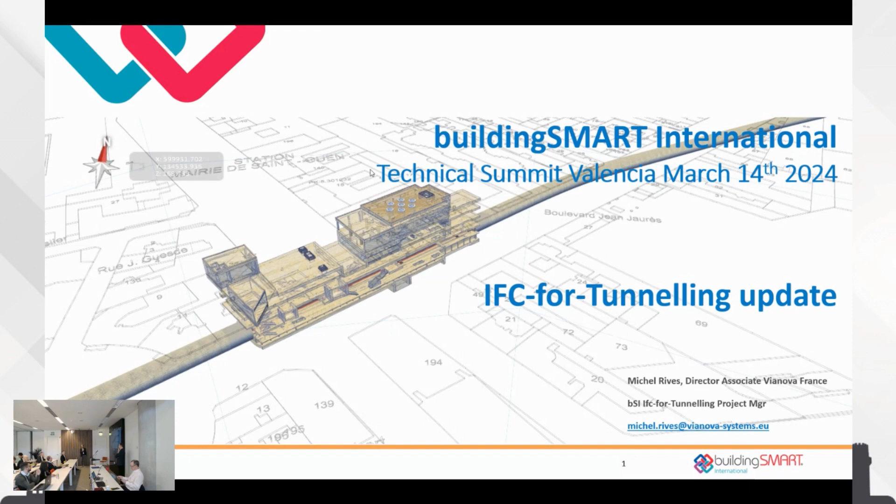Okay, thanks. Right, so the agenda for today: basically an update on where we stand in terms of the deployment, meaning the integration by software vendors of those concepts that we've been developing. A word on the collaboration that we have been having with OGC. That has been as well something key in the project itself to make sure that we were co-developing concepts with OGC, specifically when it comes to geotechnics.

That's a subject that has been touched yesterday morning and this morning as well, what it is that BIM and GIS have in common. This one subject matter, subsoil modelization, subsoil knowledge or lack thereof, that has been something that we, from the ground up, decided to develop in common with OGC.

So we have a common conceptual model for geotechnics. And then the deliverables that we are to produce so that the outcome of our project gets into the publication process for ISO.

Thanks, Andre. So nice of you.

So I was talking about a terrific team. So, you know, some project teams typically would meet in a bar. They would discuss potential concepts, future ideas in a bar. We discussed in tunnels. So this took place in Oslo at the previous BSI conference.

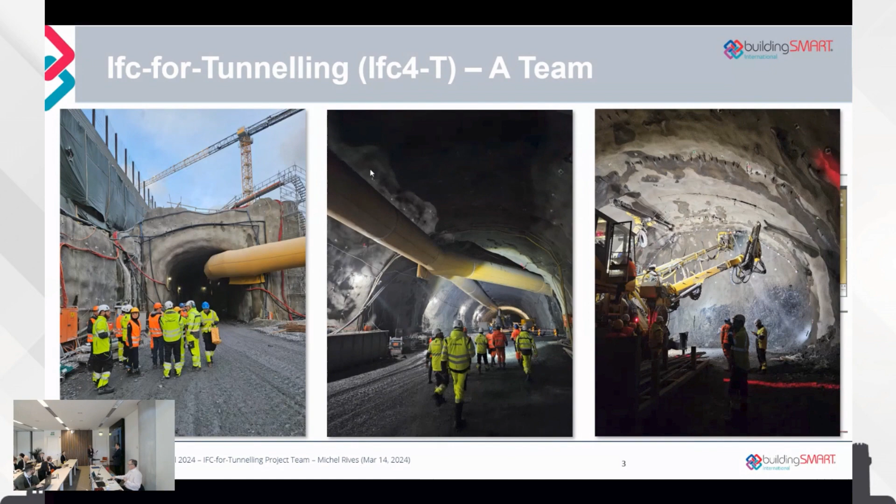So that people can understand exactly what is the implication of what it is that we are developing. So it's really to help design, but it's to help construction. It's to help with as-built recollection, and to some extent, it is meant to help as well with transferring over information to GIS, transferring over information to assets management. So we have all those concerns in mind when we started the project.

Okay, you're getting lazy now.

You've seen that before, but we extend the 4.3 schema with specifics for describing what the tunneling structures are about. That's one addition. But the other addition is this one thing that is much more transversal and describes what the subsoil conditions are. This serves underground structures, but also bridges and buildings when it comes to deep foundation. So all that part we are adding to the IFC schema will serve those different domains.

I think that is rather key and to the benefit of several project teams and domain rooms. And of course, at the end, we enrich the ISO schema. Thank you very much.

The way we decided to structure the project was to make sure we had representatives from different profiles of stakeholders, meaning designers - so basically geotech engineering bureaus, civil engineering bureaus - owners, infrastructure operators, national bodies, who would typically be prescriptive as to how to use BIM and open BIM in the context of those projects.

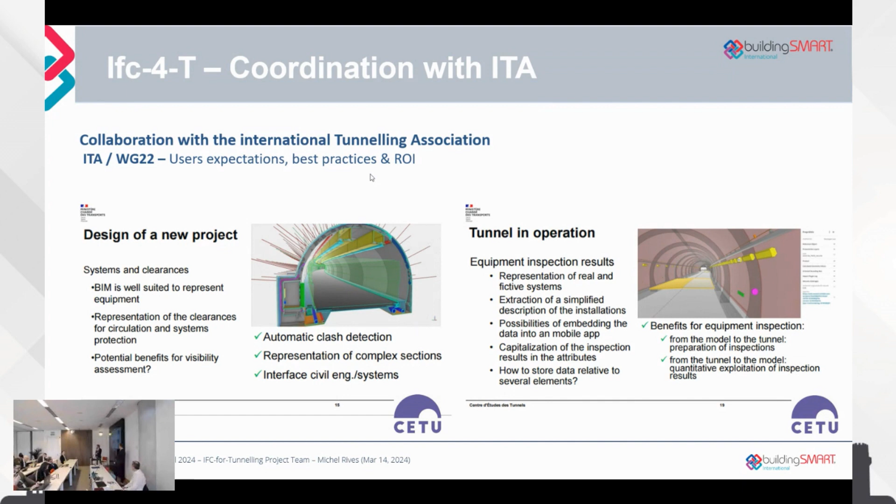In addition, they produced recommendations. The reason I'm stressing this is because in these international guidelines, or in the German one or the French one, to give a few examples, they really refer to IFC for tunneling and what the value is. Those documents we do not produce, they produce - and of course, that engages us clearly with the responsibility to deliver upon that expectation.

So let's jump a little into the scope itself. We have three main areas that we are covering: geotechnics, structures - underground structures - and systems, the systems that allow operating an underground facility, an underground tunnel, or an underground space.

To start with, as far as geotechnics, what we did first was an analysis of what was existing today in terms of what OGC was covering in terms of geology, and what BSI was covering in terms of geology as well.

Because we identified quite quickly that everything that relates to geotechnics when it comes to the construction of an underground structure was not really properly covered, we ended up stating that we needed to develop those concepts, those object classes, to describe how a subsoil configuration can be specified, and whether one knows or doesn't know well what the underground situation is about. Typically you would make an assessment before you start to excavate, and then you face the real situation whilst you are excavating, and then you need to document what you have faced and what you have been reinforcing, for example.

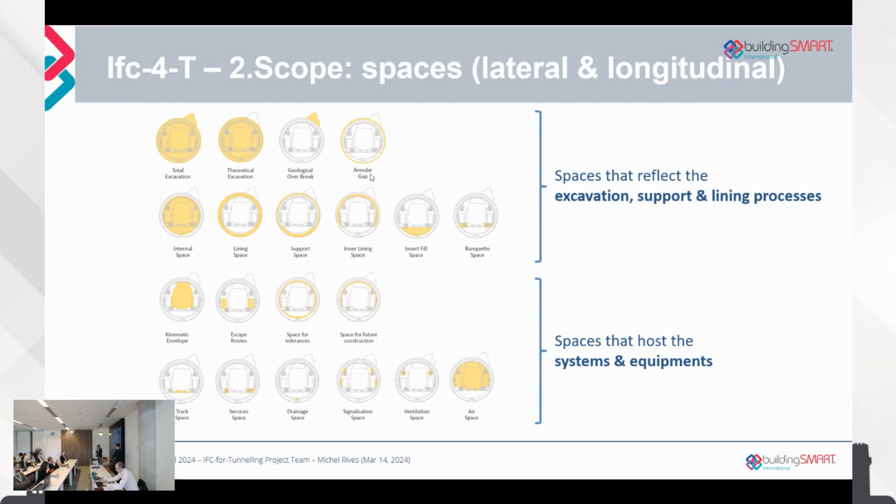That was the first thing, one of the first things we did.

When it comes to the structural aspects, we identified three main ways of realizing tunnels. One is through a tunnelier, a mechanized approach using a TBM, tunnel boring machine. Another is through a conventional approach, typically drill and blast. And the last one relates to prefab structures like cut and cover.

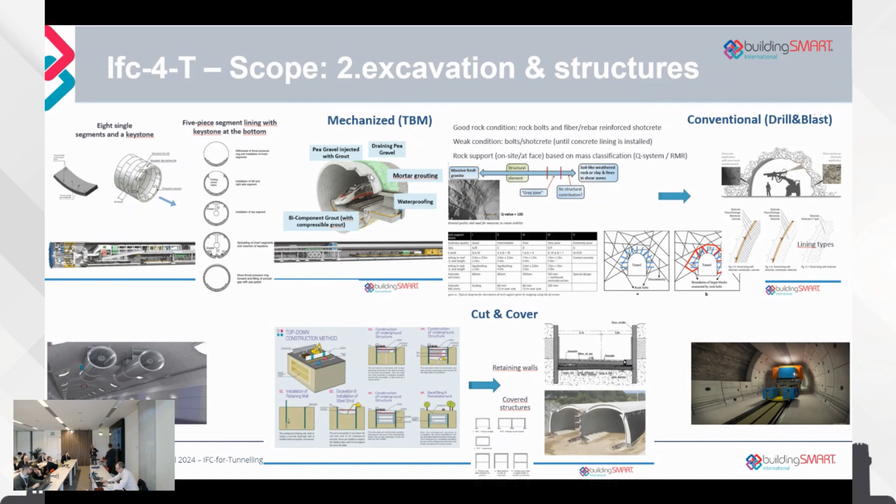To some extent, this forms the basis of what we could inject into the IFC for immersed tunnels that the maritime domain is contemplating developing, because this can be derived from that part of our project. So there is a connection between two domains.

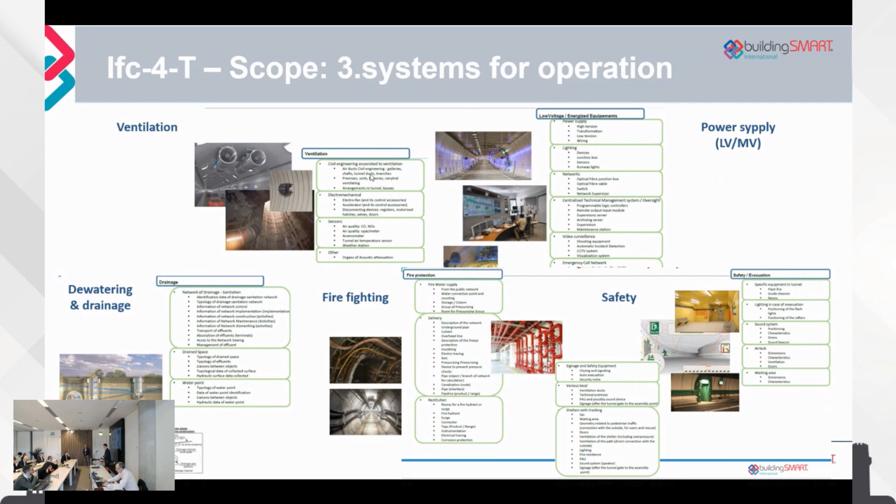As far as systems are concerned, we need to describe ventilation systems and their components, dewatering and drainage, firefighting, safety, and power supply, which are the main components of the different systems you'll find in an underground structure.

With that, I think I should hand over to André, who will explain how we leverage this domain expertise.

First of all, we did our requirements analysis. This was done together with the domain experts, capturing their domain knowledge and requirements, and defining the taxonomy. All of that was done mostly in Excel sheets, because this is something they can deal with.

We then took this as a basis to design the conceptual model. For this, we used Enterprise Architect, a UML modeling tool. This conceptual model is then the basis for the actual schema extension, which we develop using Express, and from that we develop all kinds of other representations.

Of course, this is an iterative process. We created a first draft, validated it together with our software vendors, and are now working on the final schema extension. Once that's done, we hope for formal approval of our developments by the buildingSMART international bodies.

So it's me, Sergei, and Stefan, who is also together with Andre in the technical team. There will be some slight repetition here, but we'll try to go into a little bit more technical detail, and then also demo some work typical of what we're doing now in the deployment process of our project. We'll switch a little bit - I'll take some parts, Sergei will take some parts, and Stefan will take some parts, so we'll switch among each other as well. I hope you hear me okay. Yes, perfect, go ahead please.

A little bit of repetition regarding the process we've been working with in the technical team. You've heard that we have the IFC tunnel requirements analysis report. We have the three different domain expert groups that provided us with their taxonomies, using their own vocabularies. And we also already have, from the IFC infra and rail projects, modeling guidelines for UML conceptual modeling. Based on this, we've done UML modeling in Enterprise Architect with the requirements analysis, taxonomies, and modeling guidelines as our input.

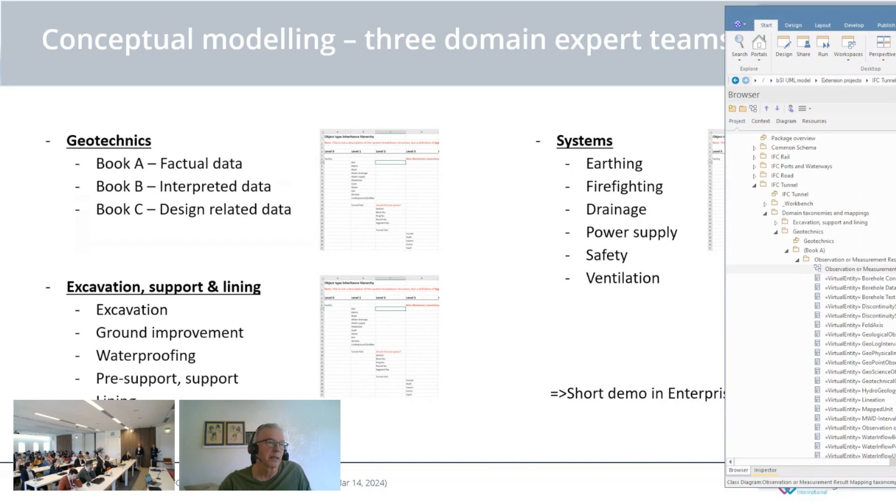Michel wanted me to just do a short demo of what we do in the conceptual modeling phase. So I'll bring in - I hope you see it, you should now see Enterprise Architect here. Can you confirm? Yes, we can see. Good. So we actually work in exactly the same way as was done in the previous infra and rail projects.

We added a piece here for IFC tunneling, and you can say this is done in two steps. First of all, we take care of the taxonomies from our domain expert teams, such as geotechnics, for example. As you see, the UML model is structured - you'd compare it almost with the structuring of an IFC file with its spatial structure and system structures. So it's a hierarchical breakdown of the model.

So here we have geotechnics with the book A, B, and C. And in here, we start with adding the taxonomy from the domain experts with their vocabularies and their definitions.

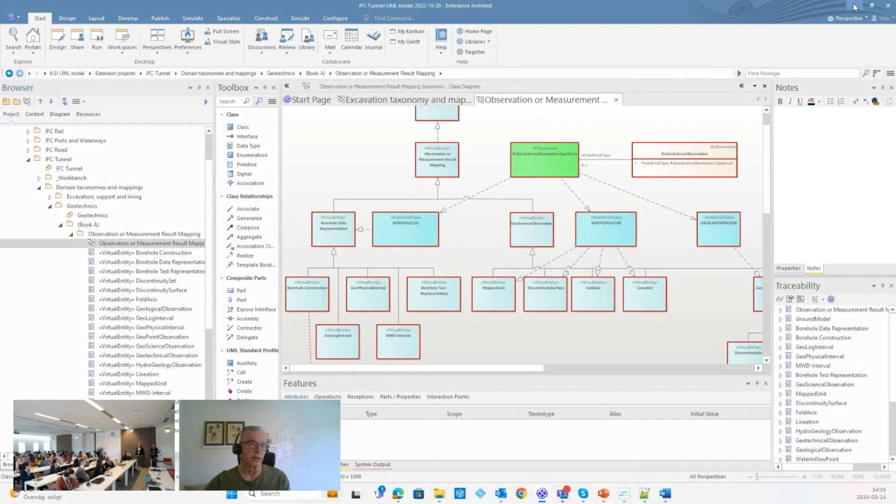Based on that, we then work with mapping that either to stuff that already exists in IFC, or if nothing exists since earlier, we need to add new concepts such as new entities or new predefined types to existing entities and so on. And when we have done this work, we can actually then generate reports.

I'll quickly show you an example how such a report looks. It's a document with some introductory text and some basic explanations on how IFC works with spatial breakdowns and functional breakdowns and component breakdowns and so on.

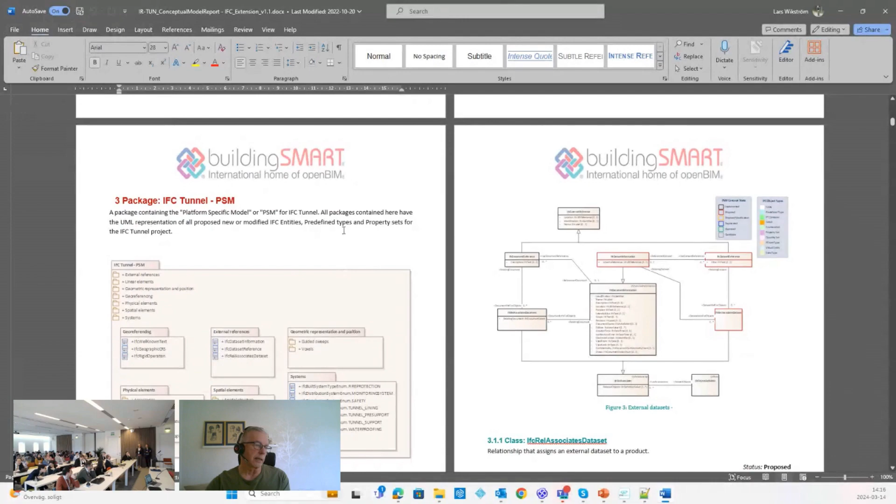And then it's practically a listing of what's in the UML model with diagrams, definitions, properties, and things like that.

The reports show the domain taxonomies in UML. They show the mappings to the proposed IFC for tunneling extension, including the complete IFC extension, but in UML form. And it shows what we actually reused from before, and it shows all the new definitions.

We have 5 reports, 1 per domain expert group. So 1 report for systems, 1 for excavation support and lining, and 1 for geotechnics. We have 1 report which covers the entire IFC extension, and then we also have a reading guide for those of you who are not so familiar with UML notation, so you can understand a little bit better what the diagrams tell you.

And with that, I think I will leave the floor to Sergei then.

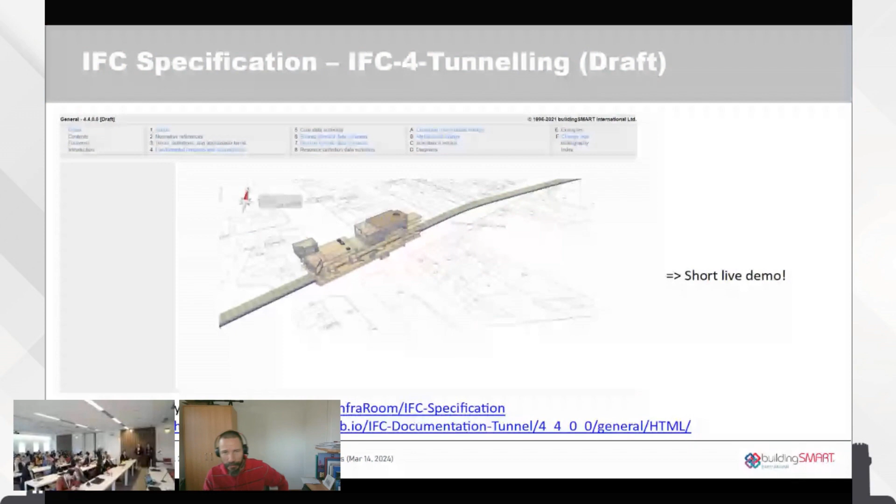So with this, I would like to say goodbye to the slides a bit. I hope you don't mind. I think you had just about enough slides in the last 3 days. So let's go to what we actually produce.

We are using this repository. Again, it's public. You have the QR code for scanning. You can access this whenever you want. It's also public to clone and download. You can also view it with our tooling at any point in time, or you can directly just go and type IFC tunnel in here and find the tunnel related.

Oh, sorry, I should have actually went to the tunnel branch. So always when you want to review tunnel stuff, you have to go to the tunnel branch, and you can then type in your tunnel specific concepts and just search for the definitions.

Andre before showed the two parallel branches that are being worked on in our process. One of them being tunnel, the other one develop. So the develop branch is where we merge in all developments from the 4.3 addendum 2.

We just now produced a diff, and we're introducing those developments again. This branch serves as our default main branch, and all of the developments from addendum 2 are then merged directly into tunnel. They are kept in sync so that we have the same baseline, or at least as best as possible of a baseline to work on the tunnel developments.

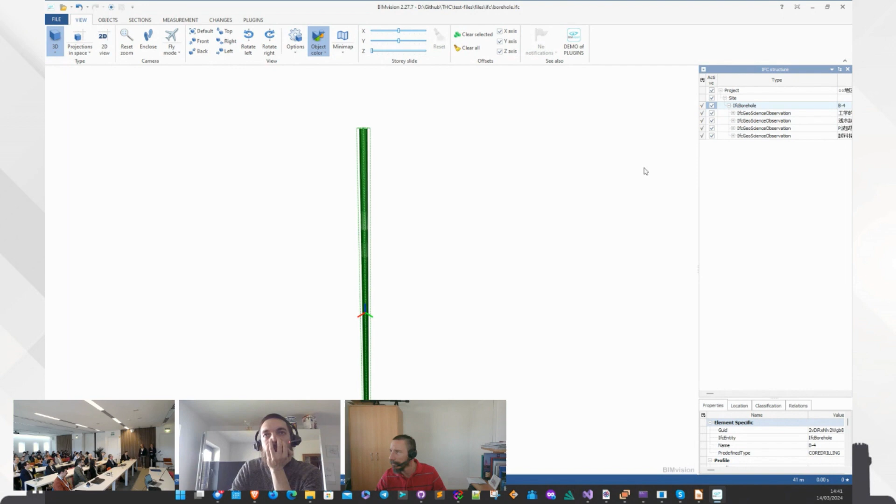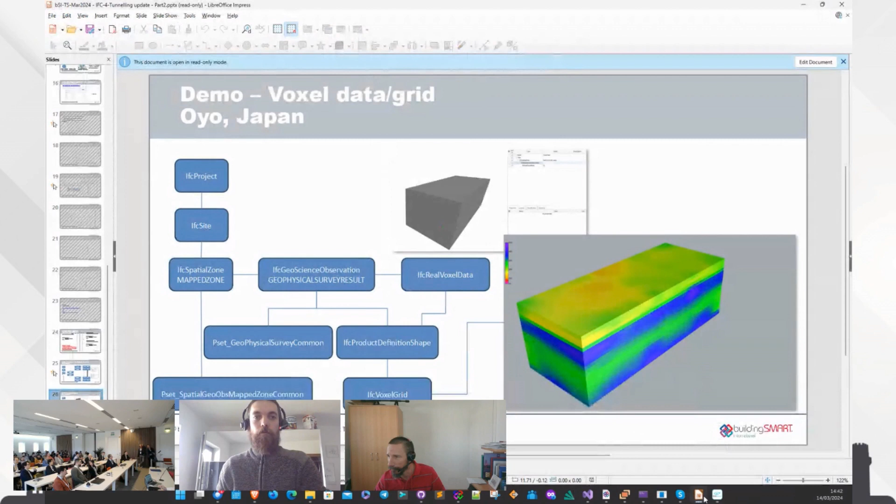Let me skip here to the live file. We have this borehole that you've seen before, and we have geoscience observations attached to it. It's hardly visible, but I hope this green line in between is visible. These then have the properties, the actual measurements, attached. Now let's get back to our presentation.

The funny thing with this is we are using all kinds of methods to produce these files - one is completely manual writing of files, another is through toolkits, and the third is to modify existing files. So we do all kinds of tricks and so on.

Here we have the voxel grid example from Oyo, Japan. This was an exercise in how to actually represent voxels in an IFC file, because this is one of our resource entities - we introduced a new type of geometric representation that can have data attached through direct linking of indices, which makes it very efficient and useful for geoscience, where each small individual voxel can have its own data value attached to it.

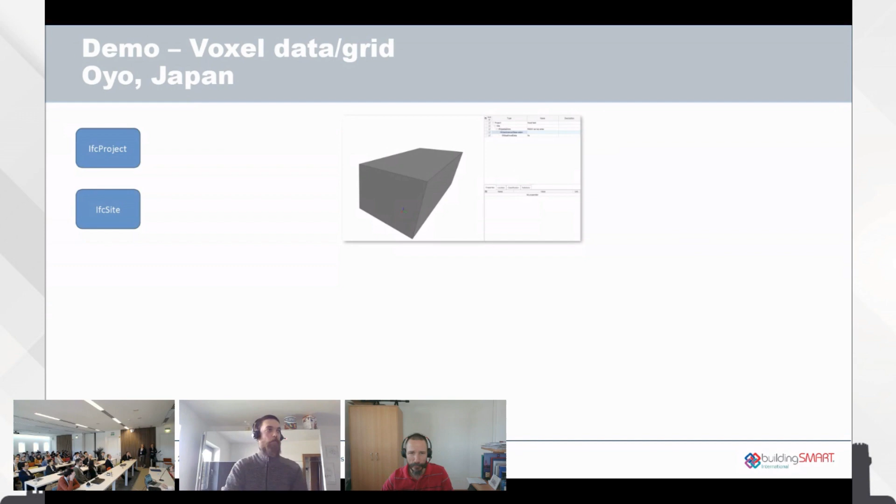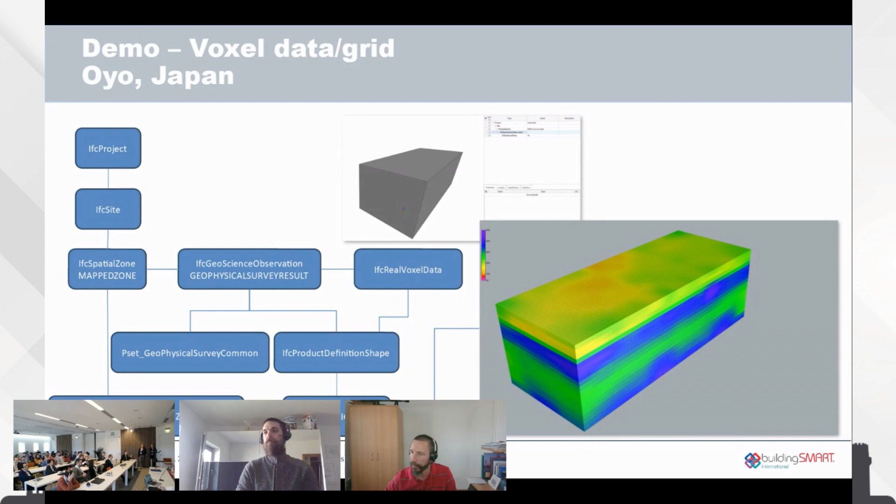Let me switch over to our other type, let's click through this one first, just to give you an idea how this works. To a certain spatial zone, we can attach a geoscience observation, which has certain properties attached to it. The most important thing is that the geoscience observation shares its product definition with an entity, IFC real voxel data, and both reference the same voxel grid, where IFC real voxel data attaches numeric values of measurements by index, like I said before. This is the actual result, as you see, for this kind of representation. The funny thing is existing IFC viewers don't support that yet, so this visualization comes from other sources.

And the other very nice mechanism that we used is, thanks also to the French tunnel authorities, a conversion-based mechanism where we produced a complete IFC 4.4 data set on existing data. The original file is 4.1, although let me actually show you here how the file looks like.

What we did here is we just read in this file, and that's why it's so good that we have a constant, parallel development, that the toolkit is automatically generated from the schema, because we can then compile the schema, check quality of our developments, but also

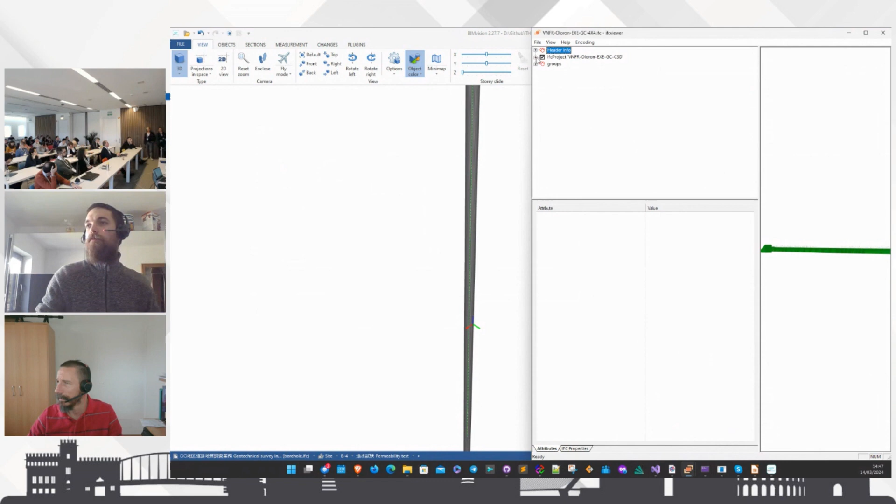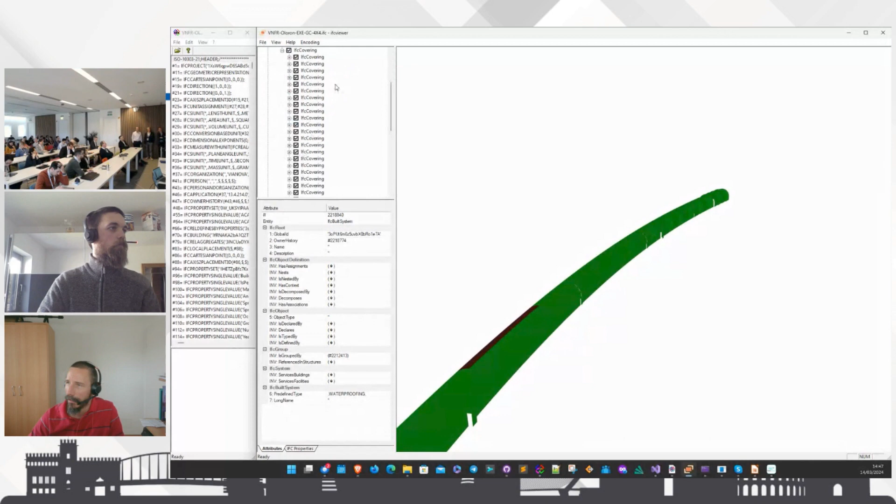We have also a visualization of this file. Let's open this up a bit. For example, not only did we create a spatial structure, we also created something like a waterproofing system. Let's see how this looks like. This is our waterproofing system, which is compiled from many IFC covering elements. Let's just check one, which has a predefined type membrane.

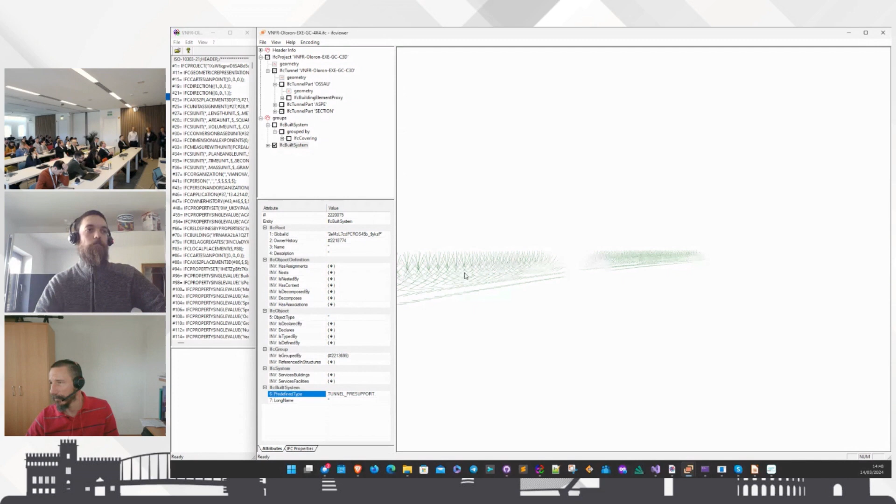And then we have also another tunnel-specific system. This one was waterproofing. We have another tunnel-specific system. Okay, maybe this one is not tunnel-specific, but we introduced it in IFC tunnel. The other system that we have is actually very tunnel-specific: it's tunnel pre-support. I find this quite interesting because it's a system of elements that's sort of very specific to the pre-supporting concept.

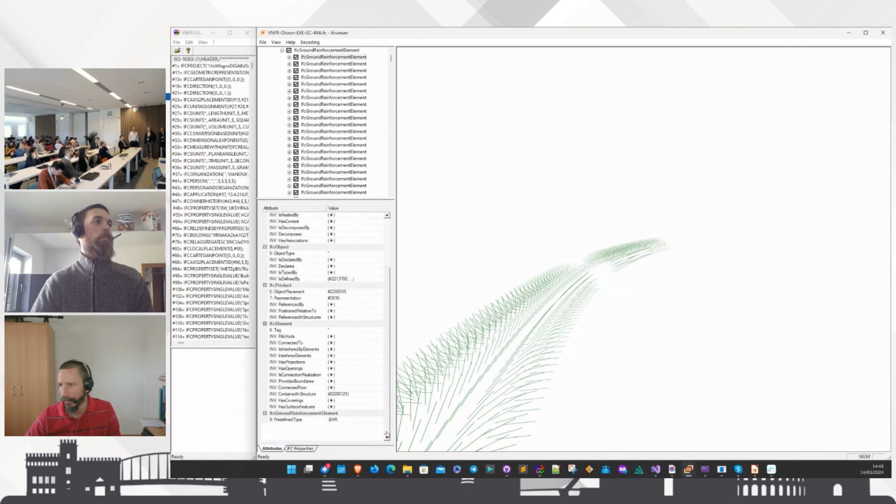And if we look in it, we can see that the tunnel pre-support has an element assembly attached to it, or many element assemblies attached to it. This element assembly has a predefined type, again, a tunnel predefined type, pre-support vault. And it also has certain ground reinforcement elements attached to it. And these ground reinforcement elements are, again, something new. They are of type bar.

And we have a very nice structure that we can use to manage and compile this. One thing I haven't shown yet is also that we have arch elements in our data set. So let's click one of our arch elements. This is a pre-support vault type element assembly. And these arch elements inside are of type user-defined support, which is a requirement that also came from our domain, as a matter of fact.

And this is just now in the pipeline to merge into the existing specification, because we weren't sure which criteria to use to produce these predefined types. So we only had user-defined, not defined lining and support predefined types for arch elements. But now there was a requirement for support, but it's not yet merged, so you don't see it in here. We have to use a user-defined predefined type. Let me show you one that is in.

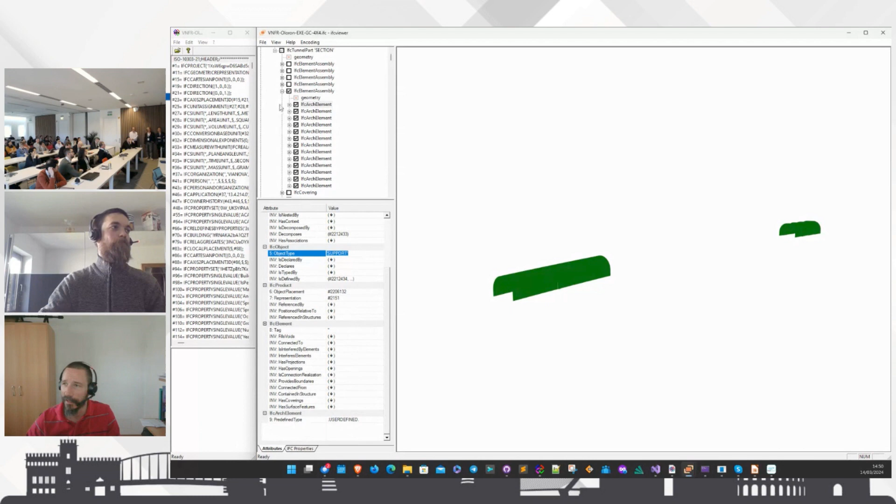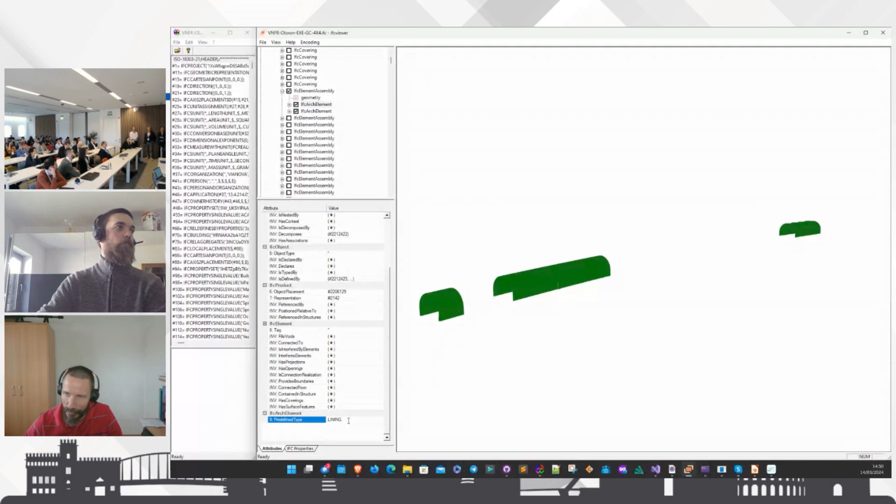Let's open this one. So this one is another pre-support vault that's compiled of arch elements, but these arch elements are of type lining. And as you see, this predefined type is already in the schema and it's already visualized properly. I could also guide you now back to GitHub, where I can show you about the support request - I mean, the predefined type support request that's supposed to make it into the schema. And once it's done, of course, the checker, the files, and everything else shall be updated.

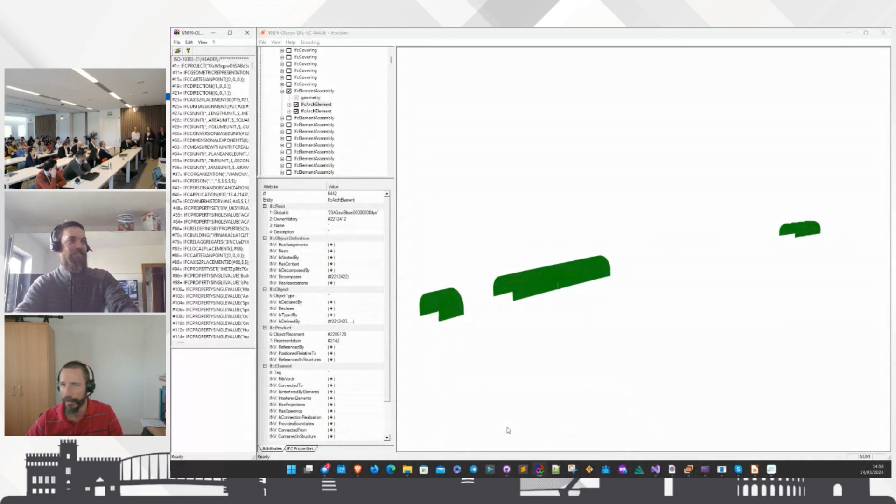And one final thing, how do we track this? Let me show you this. This is the original file on the left, so you see 4.1, and this is the 4.4. This one has only one owner history.

It has been produced by Autodesk Civil 3D by Villanova. So really nice tracking. But now let's see what else we can do with owner history. Again, owner history of the original Autodesk Civil 3D Villanova, but then we introduced new elements, or this is the owner history that modified existing elements, and you can see all of the arch elements were modified, building element proxies, coverings were modified.

It was produced by the tunnel team. And we also have some additions from the tunnel side, where you can see that we actually introduced completely new entities. So we aggregated a bunch of stuff, but the most interesting are the element assemblies, pre-support vaults. And you can see these elements have been added again by the same entity, by the tunnel team.

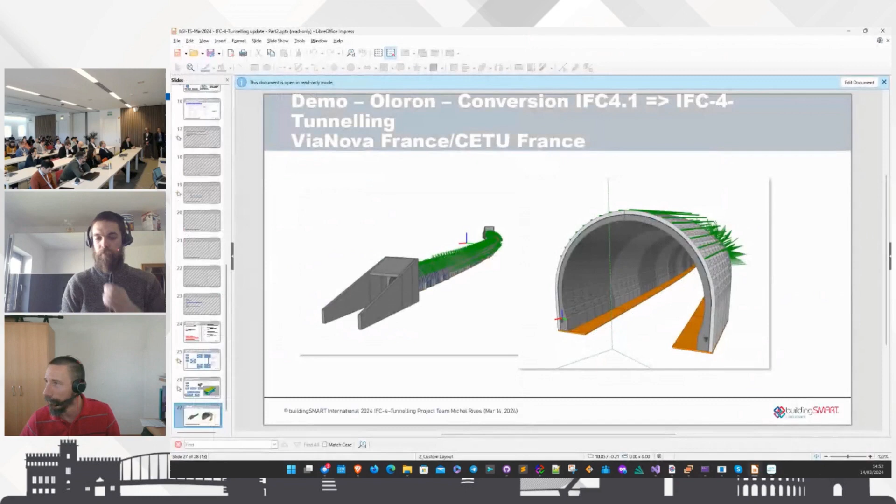Oh, of course, tunnel parts and the systems were also added for filtering possibilities. And with this, let's just jump quickly back. Thank you very much for your attention.